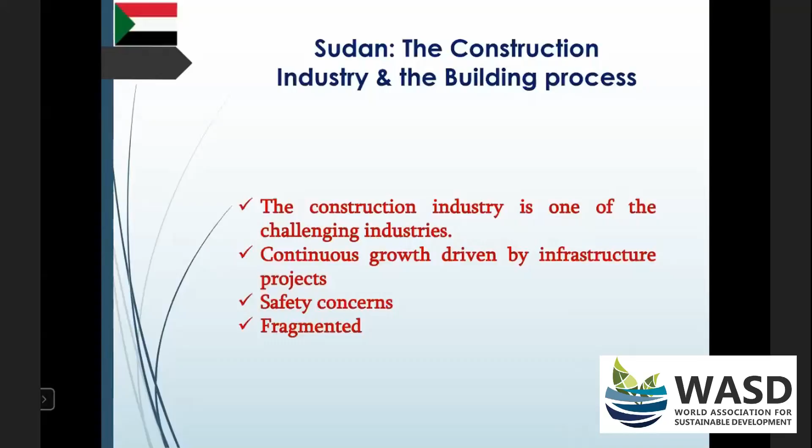Right, the construction industry in Sudan, as in many developing countries, suffers from a multitude of challenges. These challenges confront the development and the performance improvement of the industry. And the problems related to construction and building materials, their production, their supply, and their management, tend to dominate the list of impediments towards the industry improvement.

So the building construction process basically involves the usage of several materials. Some of them are natural, others are man-made. And because of the appearance of new trends in building architectural and structural designs, more man-made materials came into the scene with more sophisticated properties to match the client's requirements for more durable, cheaper, and ecologically friendly options.

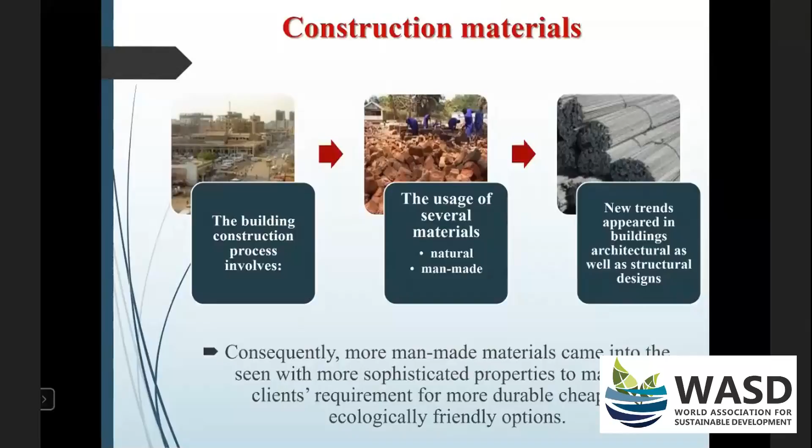Concrete is the most widely used man-made structural material. It's a composite material that is mainly containing aggregates in their two different forms, the fine and coarse aggregate, as well as cement and water added in different proportions, and sometimes we add some admixtures for certain properties. However, concrete is criticized for being an environmentally unfriendly material.

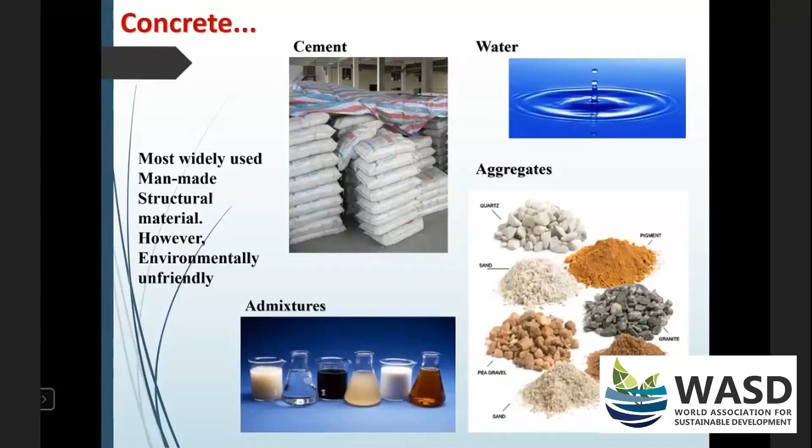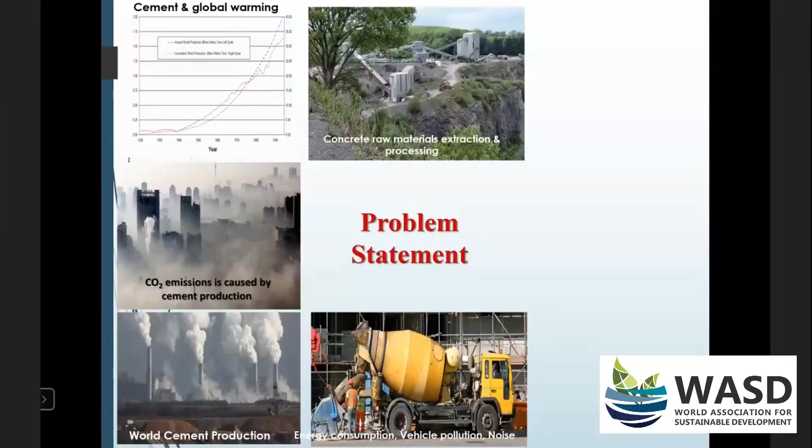The production of concrete involves the use of cement, and cement production is one of the main sources of carbon dioxide emission. The production of cement involves depletion of natural resources during the raw materials extraction and processing. And also concrete transportation consumes energy and poses some pollution to the environment as well. So the impact of concrete production on the whole environment is that it destroys the natural infrastructure without replacing the ecological functions that humanity depends on.

So our aim concerning this part of our research is to find environmentally friendly materials, to look for more comparable options, and to look for something that is sustainable, but at the same time could do the same job that the components of the concrete mix can do. So we basically were thinking to go green.

Our objectives are as follows. We wanted to explore the availability of kaolinite clays as a naturally occurring mineral in Sudan, and we wanted to prepare metakaolin, which is a thermally treated form of the kaolinite clay. And we wanted to determine the chemical composition of this metakaolin and to assess its pozzolanic reactivity, because we're going to use it in replacement for cement in different types of concrete mixtures, so that we can determine whether it's a suitable material or not.

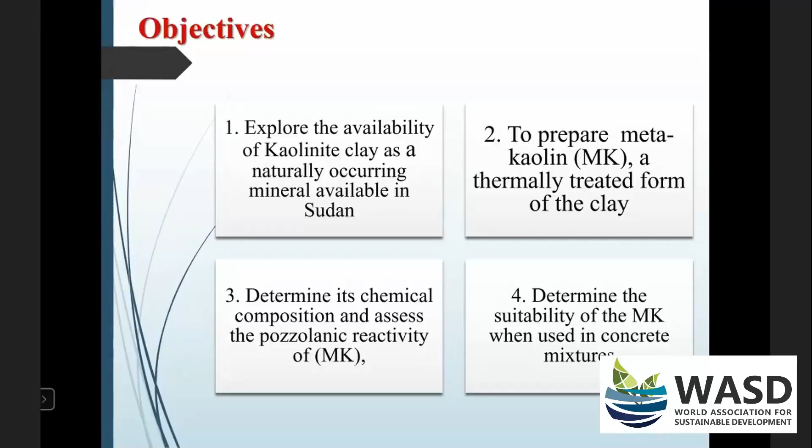So the methodology that we basically adopted was as follows. The kaolinite clay was collected from 4 different locations in Sudan for this study. And after that, we transformed the kaolin clay to metakaolin through a calcination process. Then we checked the chemical composition to determine the major oxides which were available in this form of material, and compared that to ordinary Portland cement. As well, we wanted to determine the degree of pozzolanicity for this new material before using it in different ways in concrete mixtures.

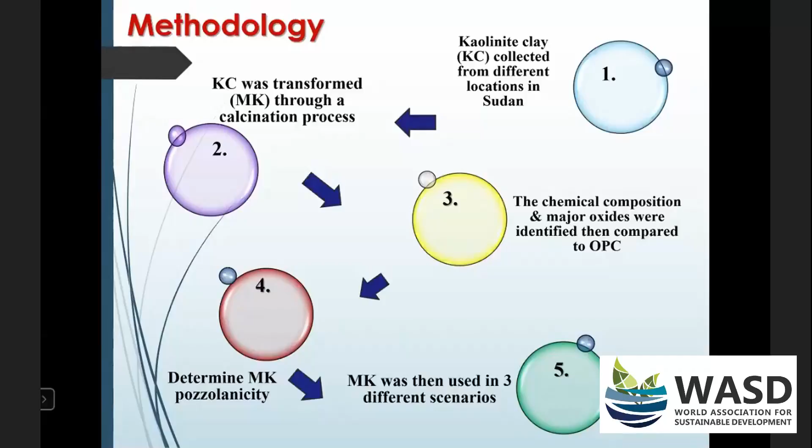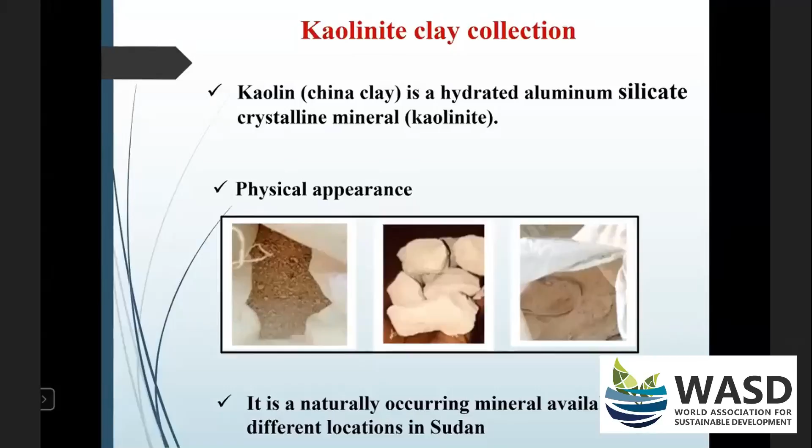As for the kaolinite clay collection, kaolin, which is the China clay, is a hydrated aluminum silicate crystalline mineral, which is referred to as kaolinite. Its physical appearance, when we collected these samples from the field, sometimes it's a powder, other times it comes in larger pieces, whitish in color in some places, and in other places the color is brownish, light brown, or maybe yellowish or grayish. All in all, it does not dissolve in water, but when it gets wet, it gets darker in color, and it gets an earthy smell.

Chemically, the kaolinite clays are structured around a series of alternating buckled silicate and aluminate layers, with the silicon in 4 coordination and the aluminum in a mixture of 5, 4, or 6 coordination.

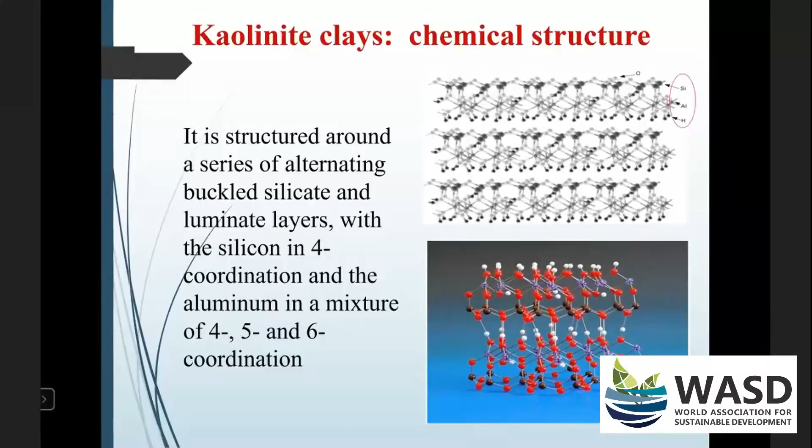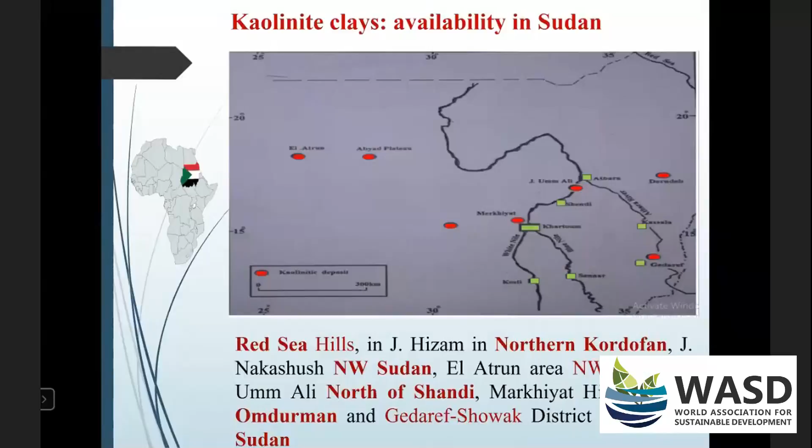In Sudan, it was found out that kaolinite clay is available in many different areas, extending all over the country. We've got samples of kaolinite clays in the Red Sea Hills in the northern Sudan. We've got some in northern Kordofan in the western part of Sudan. We've got some in the northern parts of Sudan, in Shendi, we've got in Gedaref-Showak, even in the central parts of Sudan. So it's available in many locations in Sudan.

The process of getting the metakaolin, which is the material that we are going to incorporate in our concrete mixtures, we had to treat the kaolinite clay in a thermal way. So it's a very simple and basic process where the mineral kaolinite was heated. Upon heating, this process drives the water out, collapsing the material structure. The ending result is an amorphous aluminosilicate, which is the metakaolin that we are trying to use in our concrete mixtures.

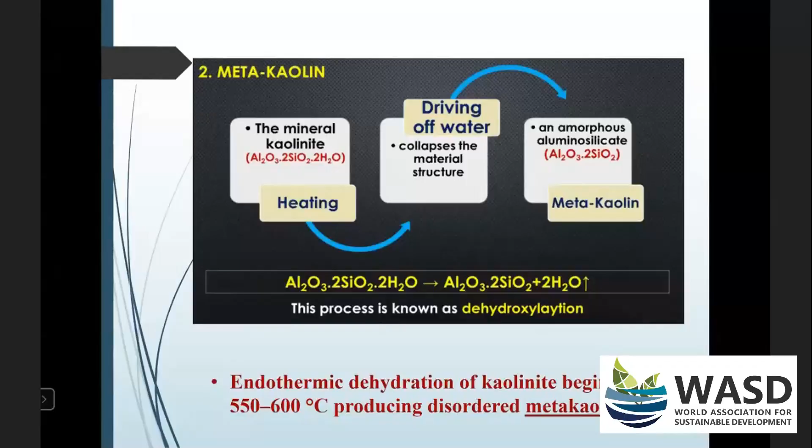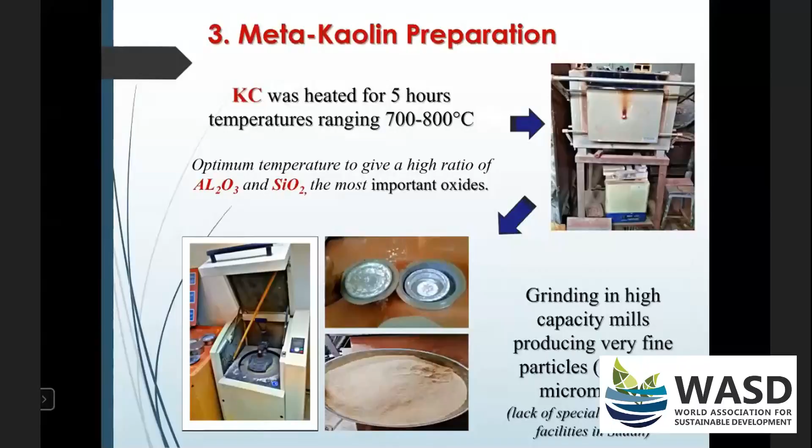For us in the lab, the kaolinite clays were heated for 5 hours in temperatures ranging from 700 to 800 degrees Celsius in a very simple furnace in the lab. And after that, the process was followed by grinding it in high capacity mills to produce very fine particles, because basically we are trying to mimic the fineness of cement in our concrete mixtures.

As for the obtained sample of the metakaolin, we had to check the chemical composition of the material by determining the oxides present in our samples. So we were focusing on the major oxides because we're trying to compare that to ordinary Portland cement. So the samples obtained from 4 different locations, Merowe, Kassala, Garre, Alsayal in Sudan, we had the analysis, and then that was compared to the major oxides considering 3 different standards: the Sudanese manufacturers, the limits according to the ASTM, as well as the limits according to the British standard.

On top of this, we had to check the pozzolanicity and the limit set by the ASTM C618. So what we found out is that the kaolinite clays are very rich in oxides that are of interest to us when we study cement.

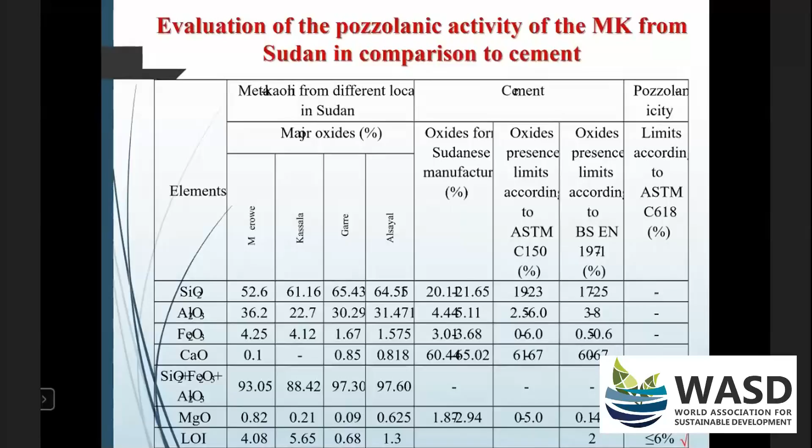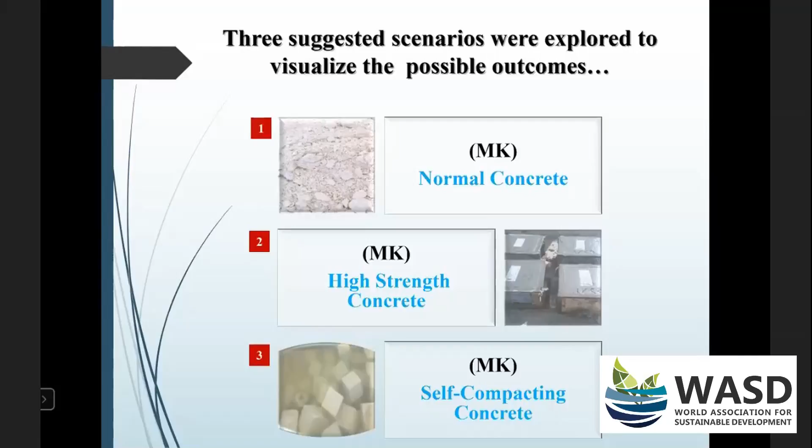So after checking the suitability of the calcined kaolinite clay in comparison to ordinary Portland cement, we wanted to use that in our concrete mixture. So 3 suggested scenarios were explored to visualize the possible outcomes. We had the metakaolin to produce normal concrete, and once again to produce high strength concrete, and then producing self-compacting concrete. So with the first scenario, the metakaolin was added in concrete mixtures in different percentages. We started with 5, and then topping it up to 10, 15, 20, and 30% in replacement for cement.

And we checked after that the compressive strength. We checked the compressive strength for the different samples in different curing ages. As for the first sample, we had it for 7 days, 28 days, and we even studied the long-term effect of this material in our mix. And we were able to get results exceeding the targeted strength for the first sample.

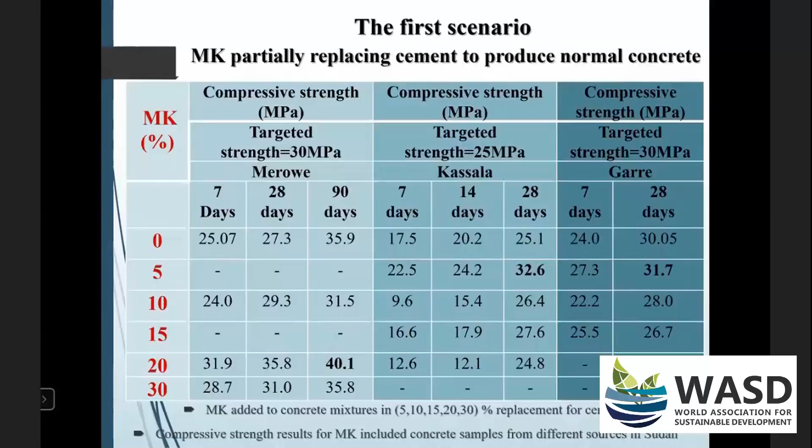As for the second sample, or the first design, we had 7, 14, and 28 days, and we were also able to get compressive strength matching the required or even higher than the targeted strength. The same applied for the last sample from another location, and it gave us the same results.

For the third scenario, incorporating metakaolin to partially replace cement to produce self-compacting concrete, three mix trials were conducted, where the first trial was not successful, and for the second and third trials, we were able to get self-compacting concrete. We had the fresh concrete tests for the slump flow, the V-funnel test, and the viscosity test, as well as the hardened concrete properties; we checked the compressive strength.

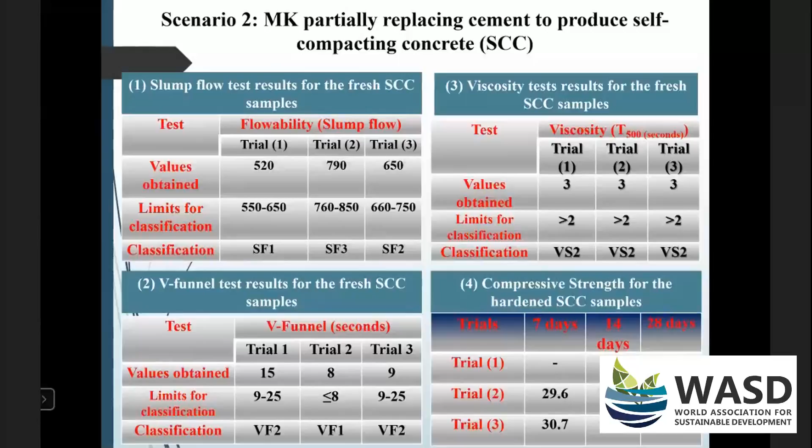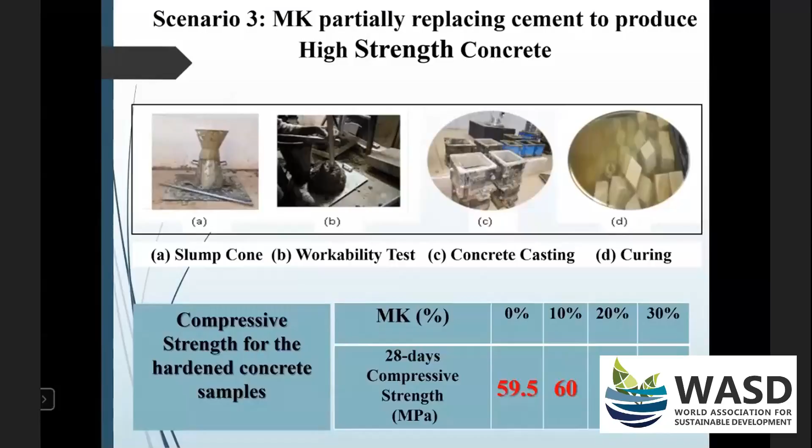So for the third scenario, we had the metakaolin partially replacing cement, but this time producing high-strength concrete. So we had all the fresh concrete tests as well as the hardened concrete tests. For the fresh concrete tests, the results were within the required set limits, and for the compressive strength of the hardened concrete samples, we were able to get compressive strength in the range of 53 to 63 megapascal, by that exceeding even the targeted strength.

So what can we say out of all this experimental work and experimental results? The kaolinite clays are abundant, and they are present in different locations in Sudan. And that makes it one of the most important aspects. The other thing is that the chemical characterization of the metakaolin showed us the presence of high amounts of silica, alumina, and iron oxides. The percentages are even exceeding the limits set for cement by the 3 standards that we consulted.

And these are the major oxides that we are looking for. At this point, we were very happy with these amounts, and we were expecting good results, as these are early indications for the suitability of this material. Also, we found out that the presence of magnesium oxide and the loss on ignition values were all within the set limits for all the consulted standards.

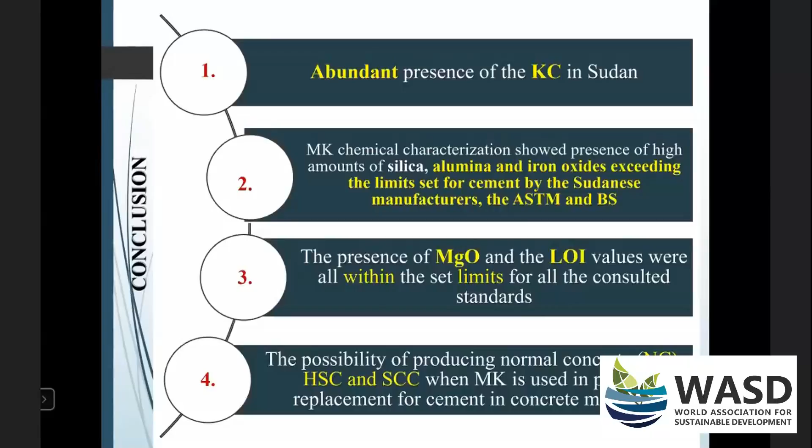It was also evident the possibility of producing normal concrete, high-strength concrete, and self-compacting concrete. The 3 scenarios that we investigated, we were able to get good results out of the use of the metakaolin. We found out that the location from which we got the source kaolinite clay makes a difference. For example, Kassal's metakaolin yielded the targeted strength in 28 days, with an optimum amount of only 5% of metakaolin replacing cement, while from another location, which is Garri, the metakaolin yielded just slightly higher than the targeted strength, with the same amount of metakaolin replacing cement.

And when we had the metakaolin included in self-compacting mixtures, that was interesting. All the slump flow test results confirmed the suitability for the different types of structures, being slightly reinforced for vertical application or normal application, while the other test, which is the viscosity measurement, showed a medium rate flow, whereas the 28 days compressive strength further confirmed that the trial mixtures meet the targeted value.

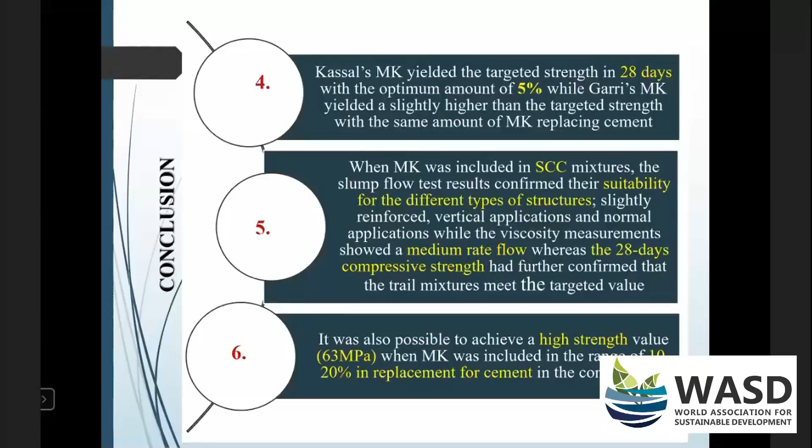It was also possible to achieve high strength values for the concrete that included metakaolin, and we got up to 63 megapascal when metakaolin was included in the range of 10 to 20% in replacement for cement. So what can we say out of our experimental work? Because we had so many samples, different ages, different metakaolin from different locations. We had the metakaolin processed at different temperatures.

So we had a lot of experimental work, and all these results gave us reasonable evidence for the usefulness of this material to be a sustainable cementitious material, because on one hand, it gives us the required properties that we need in our concrete. And at the same time, it's available, abundant, it doesn't really need chemical treatment or processing, and it does not deplete the environment. So we're not harming the environment. We are getting what we want for the concrete that we are producing. So we were quite happy with this material to be used for concrete.

As a cementitious material. And I think we've still got more and more experimental work on it, to have it in more types of concrete and studying it at longer ages. But the results until this point gave us very reasonable evidence that this could be one of the sustainable construction materials. Thank you very much for your attention.